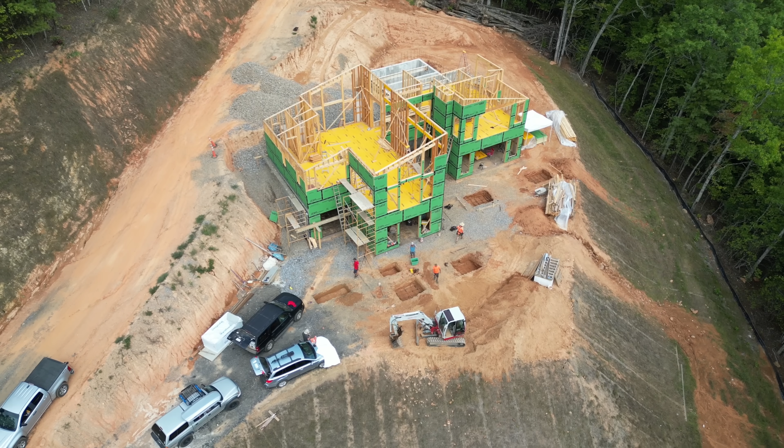Eric and the guys have completed the steel work down in the base of the footing, and it's really large and strong looking. I'm very happy about that.

The next part I'm going to do is build a square plywood box that will be the form for the part of the column that actually sits on the footing. It's all going to get poured together at one time, so it has to be suspended above the footing with some stakes and braces, and it also has to be precisely located.

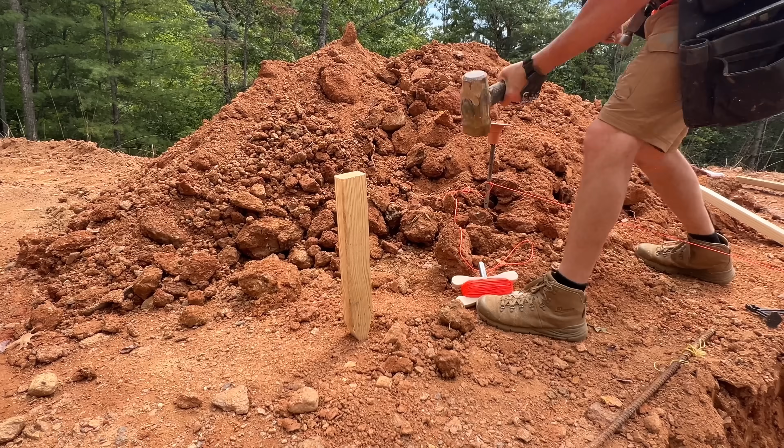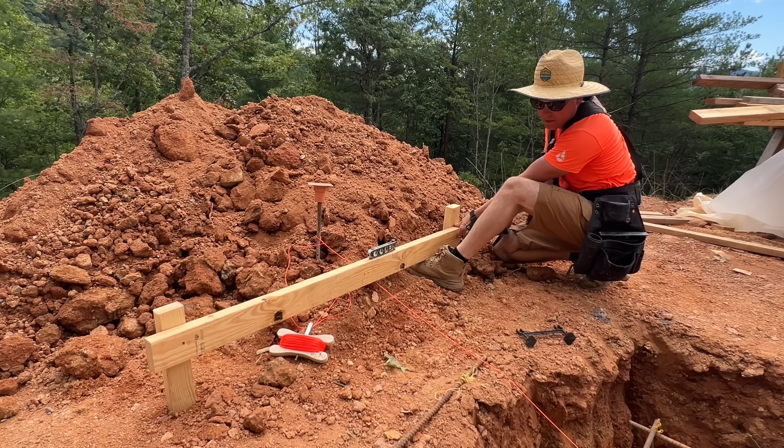Since I'm getting to a part of this job that needs to be more precise, I'm going to build some batter boards so I can move my string back and forth instead of having it just attached to a metal peg on each end, because there's no way to make fine adjustments when a string is just hooked to a metal peg. I need something where I can move it over an eighth, or move it back and forth. All right, that's not terribly bad.

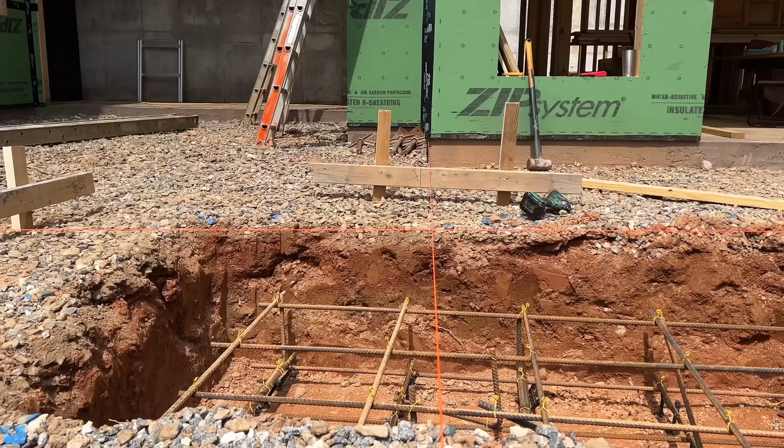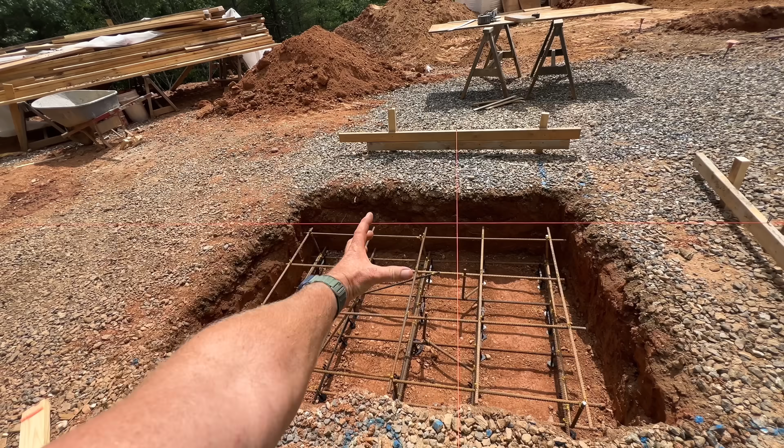Jamie and Jono have these string lines pulled accurately across the top of our batter boards here, or so they say. Now we can place some framing that's going to go across the footing that will be the outside edge of our formwork for our pier that's going to come up through our slab. So that's the next step.

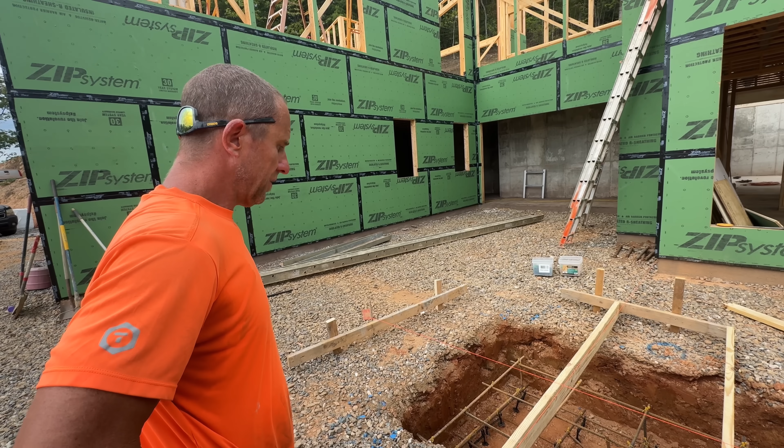We're ready for our forms on this footing and that footing, and that was a lot of work. My back is killing me. Yeah, that was a lot of work. I was thinking, oh, we got a big trackhoe, dig some holes, no problem. No.

And it looks like Jamie's got all of these footings now drawn into the SketchUp plan, the master plan of this house. What can you tell me about these? Well, I can tell you these things look huge because they are, but I'm also really trying to visualize what's going to happen where the post framing sits on top of the pier.

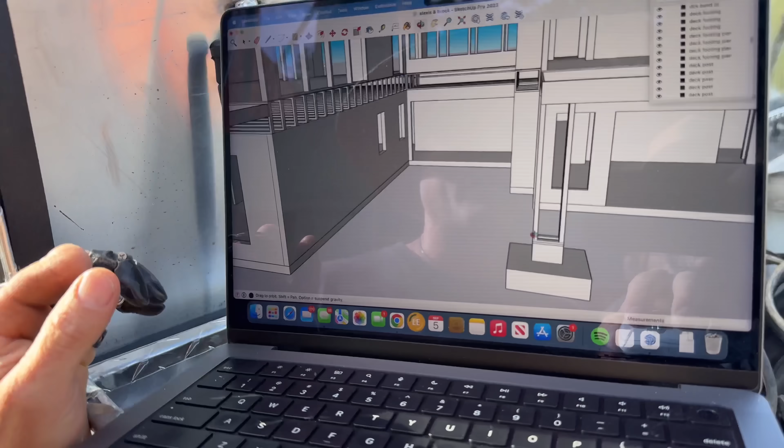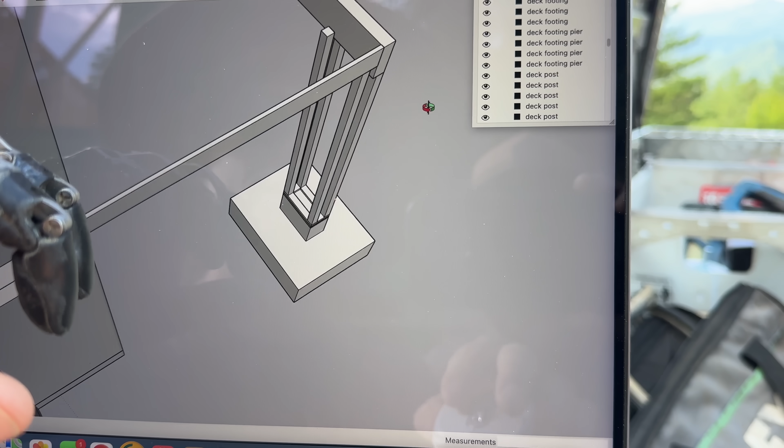So that pier that we're building the form for is right here, and then we have wood framing above that going up to the bottom of the deck. Now this intersection right here, I don't love right now. We have a giant laminated treated beam, and then we have standard 2x10 joists butting into that. And you can see I have my posts just ending out here in the middle of nowhere. I don't know how we're going to do this yet because I don't love this.

I'll get it in the screen here someday. This right now is not looking good to me, and we need to figure out a way to flash it all. That's really what it comes down to for me. I'm thinking ahead about the flashing and the finished surfaces on these columns and the decking all meeting there, and how to make it waterproof so water never goes into the column to rot it out.

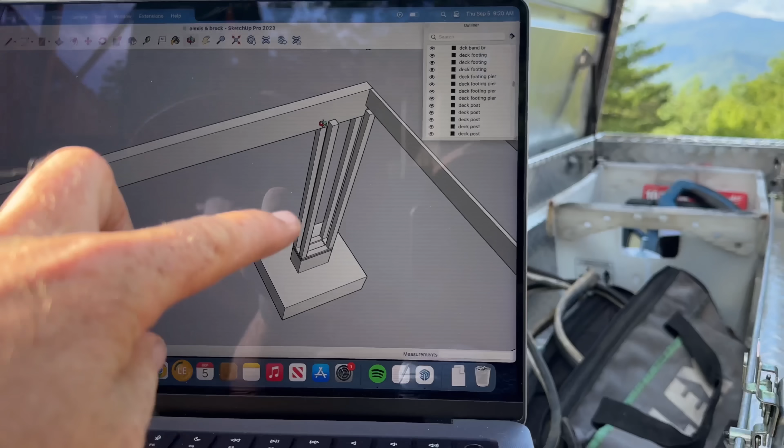Yeah, and I do want to mention that the way he's got it drawn here, there will be sheathing and siding, so it'll be like a closed-in column. It'll look like a little miniature skyscraper. That's what we're building, skyscrapers right now. It is, these little mini ones. That's a good way to put it.

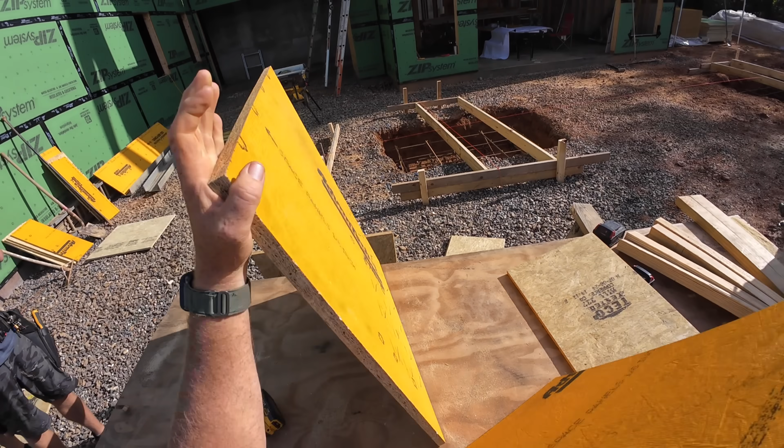The guys have got a lot of these pieces cut now, so I'm going to start assembling. We're going to put the coated side in because I think the concrete is less likely to stick to that than to this side, not sure really. And we're just going to use a finish nailer to tack everything, and then we'll come back and add some screws or something. So here we go.

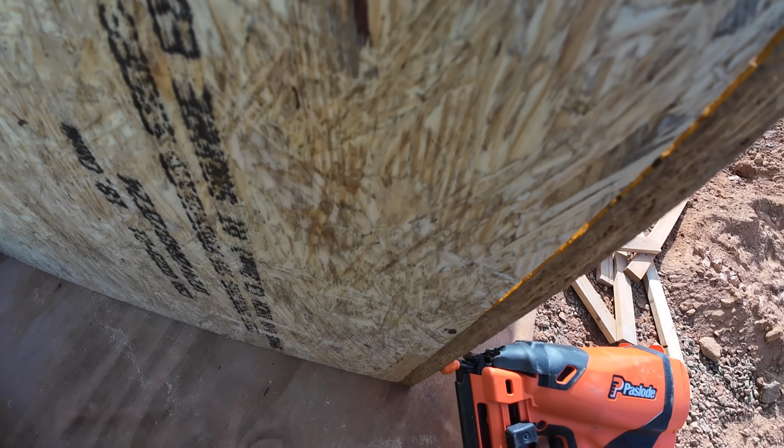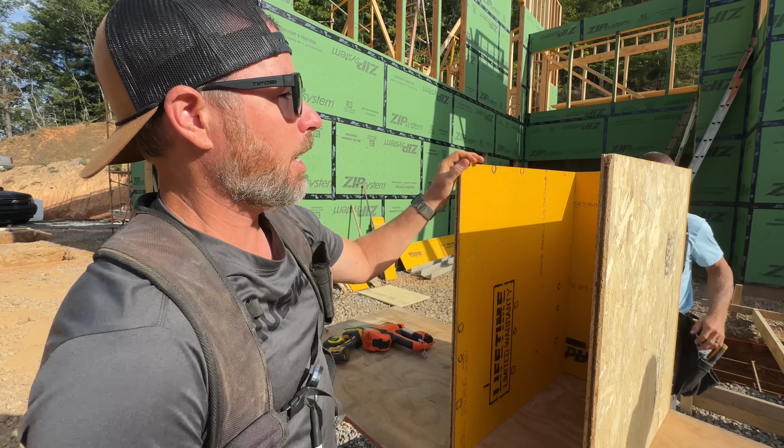Now I'm going to show you guys how to disassemble one of these, because these were supposed to lap on the outside edges of the end, and I didn't check that first. It's no big deal, yep, that's how you disassemble one. Let's start over. John, you got pliers right there.

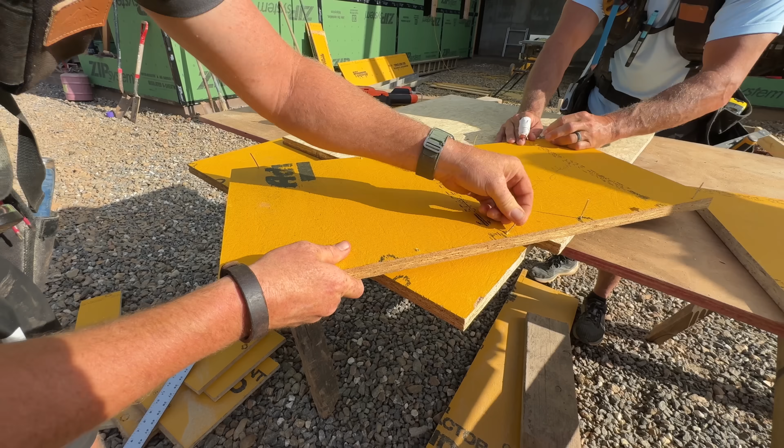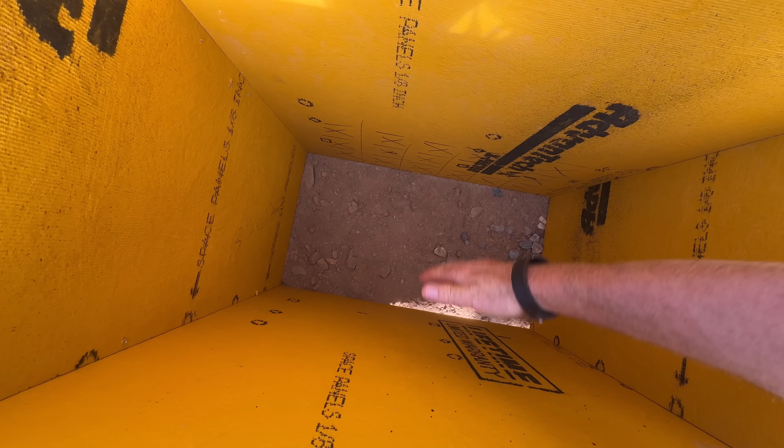Jamie said I just built a subwoofer box, but yeah, you're actually right. Listen to this. Based on the frequencies I'm hearing right now, I think we may have just found like a golden ratio here of subwoofer. Let's see what kind of tones we're getting here.

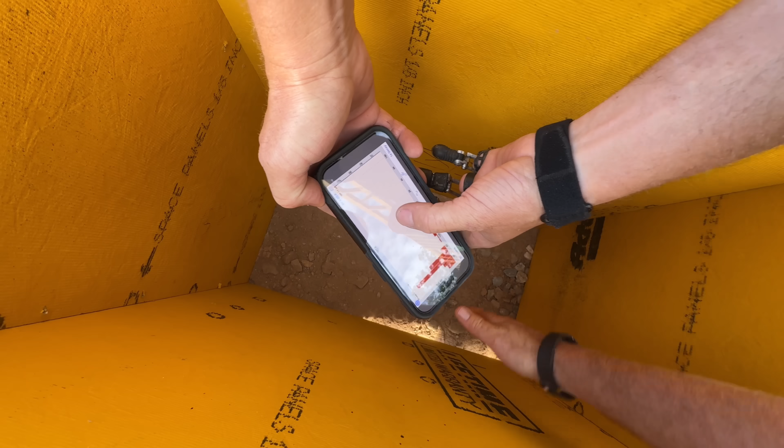Oh dude, that thing is hammering hard at 40 hertz. 40 hertz, is that good? Yeah, that's like the low end of a kick drum, like on a drum kit. Yeah, that's the bit you feel. Oh, like in your chest. Yeah.

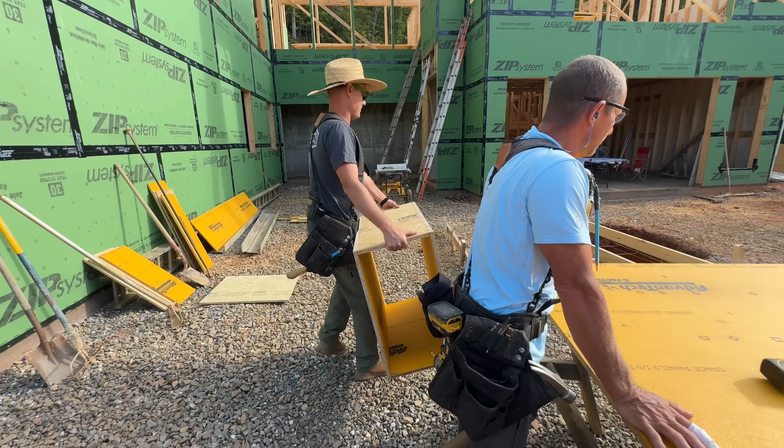We've got marks here where the outside surface goes, and if we bump this over, it should be squared up and everything, because the way we installed these, they're square to the house, right? It should be.

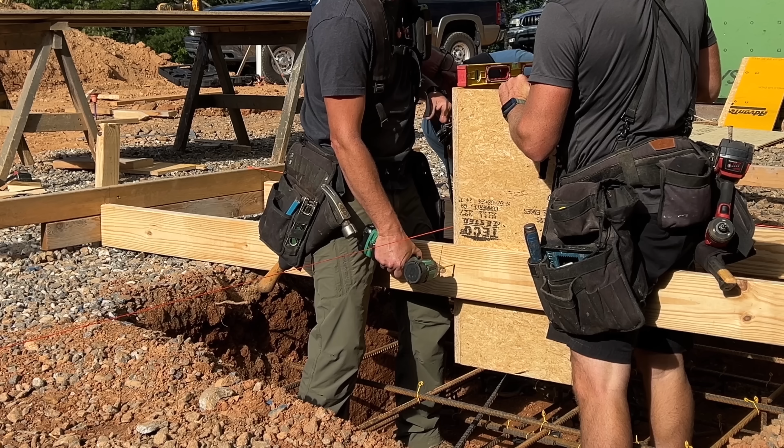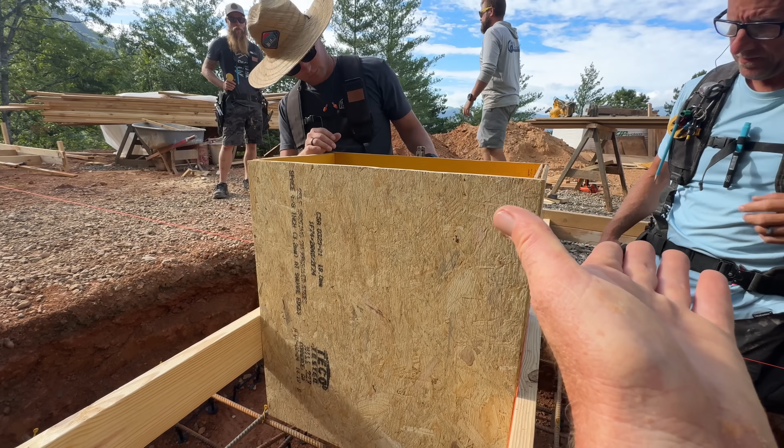Okay, I'm good there. Now we need to lift it up off of the steel down here. We've got this first box suspended at the right height so the footing will be flush with the bottom. Then we're gonna set up a laser and cut all these the same height at the top, I think is the plan. We might also add a brace, because right now it's a little to the side. We could probably cut one in between that batter board.

That's the slab height, so we're gonna come up a foot from that. I was thinking we could pour this without a pump for the concrete. Yeah, but dude, there's no way a concrete truck is gonna get around that to get here. Probably not. It's probably a full yard of concrete in each one, at least, maybe more.

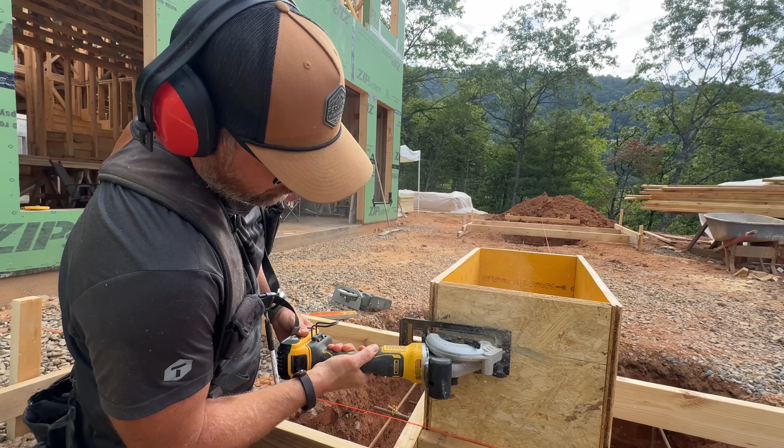There we go, the top is cut off at the right height. Maybe you could tell everybody why we decided to mark it and cut it off in place instead of just putting it at the right height to start with?

Yeah, that's actually a good question. The reason is it's really difficult to get it oriented in three different axes all at once. It's near impossible, you'd have to just fidget. So we broke it down now into orienting it level, and then after that, a second step, getting the height correct. It's a lot easier and we can get it more accurate on the first shot. I think it's less stressful too. I think it's a good way to go.

Yep, axis is the word? Yeah, it's what they used to cut down trees a long time ago. Maybe it's axes, I don't know. Axes, dude, that's possessive. Don't matter. I don't know.

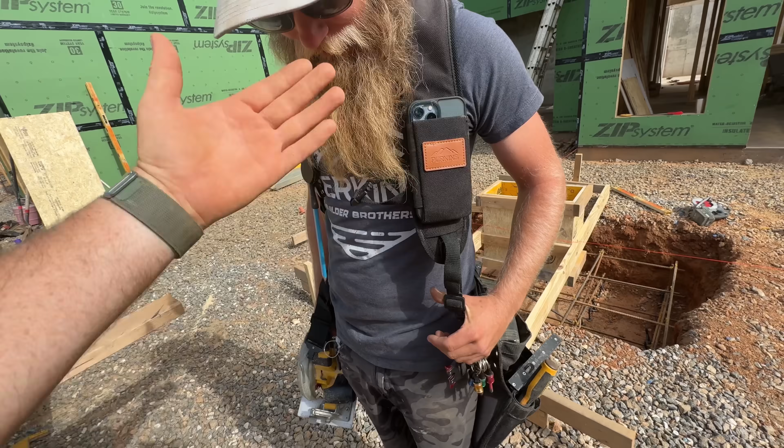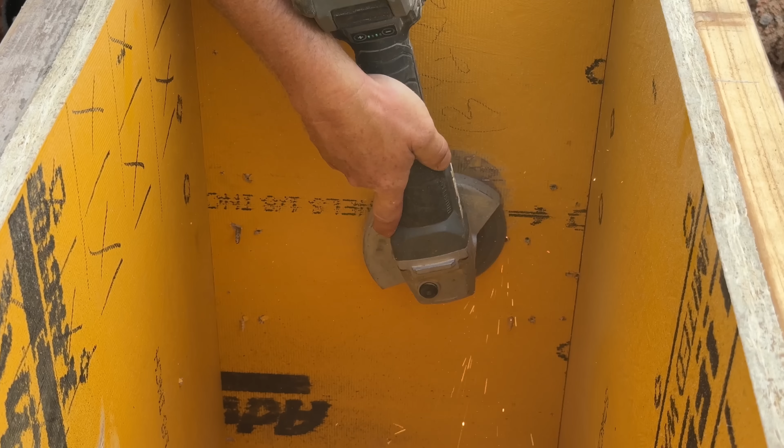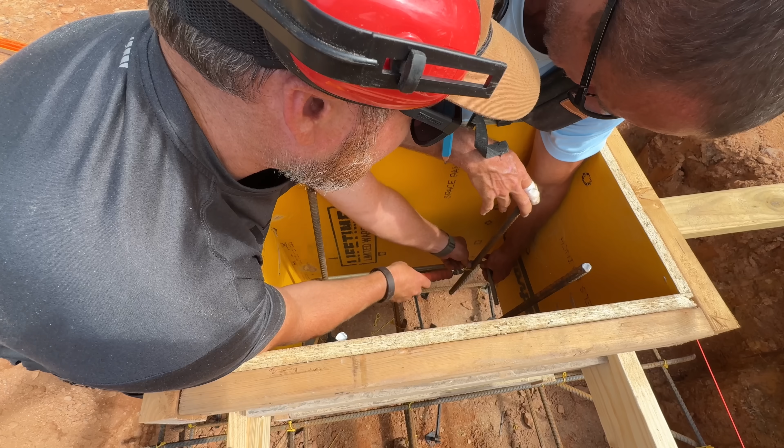Sorry. Well, if you thought we were done with these, you're wrong. Unfortunately for us, we've got to add steel now that goes down our columns and ties out into the mesh of steel below. I think we'll do 4 or maybe even 6 of those per, Ray. Start with 4 and then let's look at it. It's turning into like building these walls with all those forms, man. Jason and I are basically having to make this work with tying the steel inside these things, so that's what's going on here.

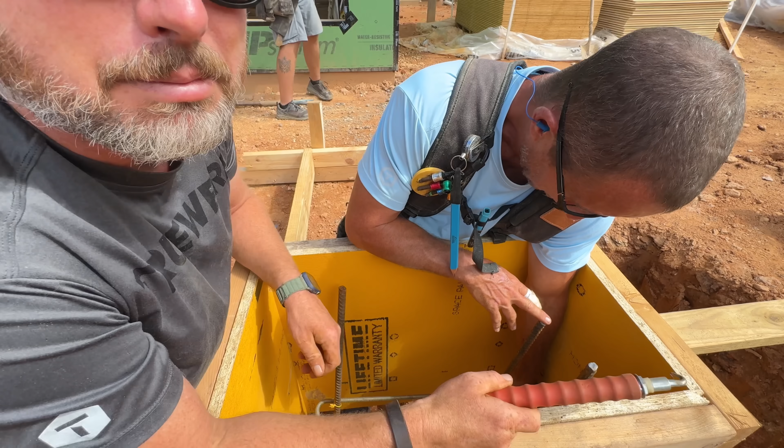And I didn't want to say anything, but dude, you smell really good. Oh, really? Yeah, I don't know what you're wearing, but it's driving me crazy. Man, hey, could be worse I guess. I've never had that happen at work. Come on, I'm flustered now. Give me the other half of that.

These guys are jumping over here to start putting up these batter boards, these horizontal pieces. They did something smart, which was to mark all the stakes with the elevation of the slab, so maybe we can skip a step over there. We just didn't have the laser yesterday. Well, we learned how stupid it is to have all of our boards at a different elevation and slanted, but like you said, we just didn't have the tools to do it right the other day, so we did it.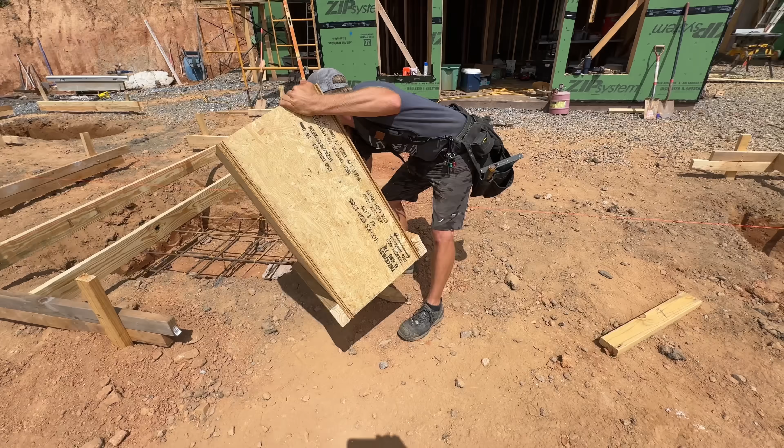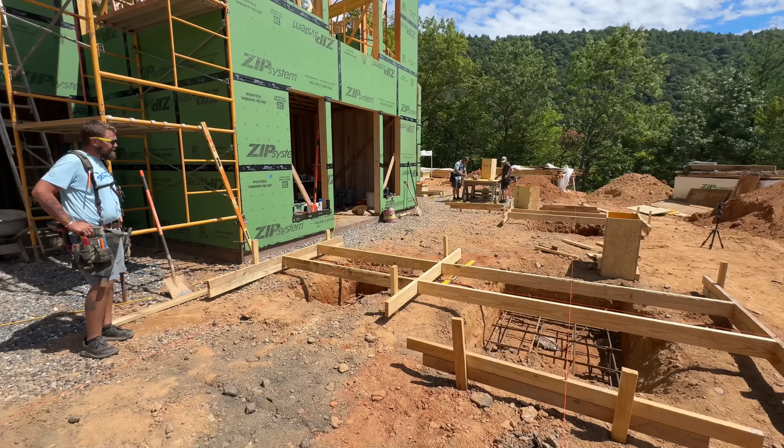Jono and I were able to get a labyrinth of supports for our forms put in pretty quickly over here, because we've just done it a few times so all the numbers are just memorized. Now we're ready to start setting these forms in, and I gotta redig a little bit of this one. Evidently I went that way with the footing, I should have gone that way, so we gotta dig back to right there. We gotta move all these cars, we gotta drive the machine back down the hill.

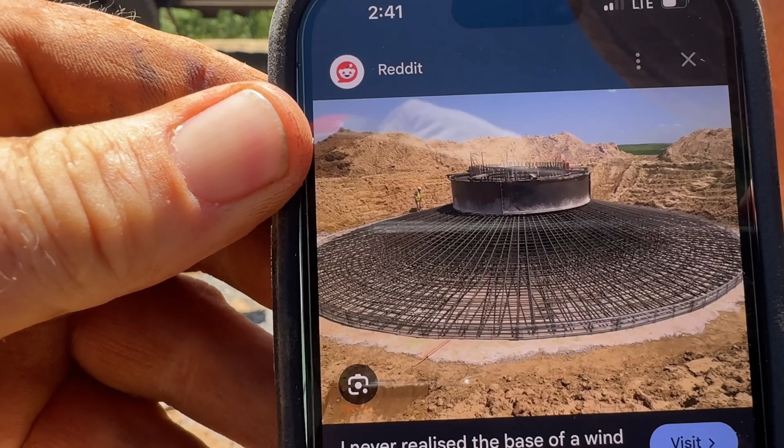We got our footing elongated, our steel fixed up to run all the way to the end, and now Jamie's showing me pictures of windmill foundations. Windmills that make electric energy from the wind. These foundations seem kind of big and crazy to us, but this ain't nothing compared to like a real pier foundation. Look at that guy, he's like, what am I doing here, where's my help? Dude, there is so much steel and concrete in those, I can't even believe it, I can't get over it.

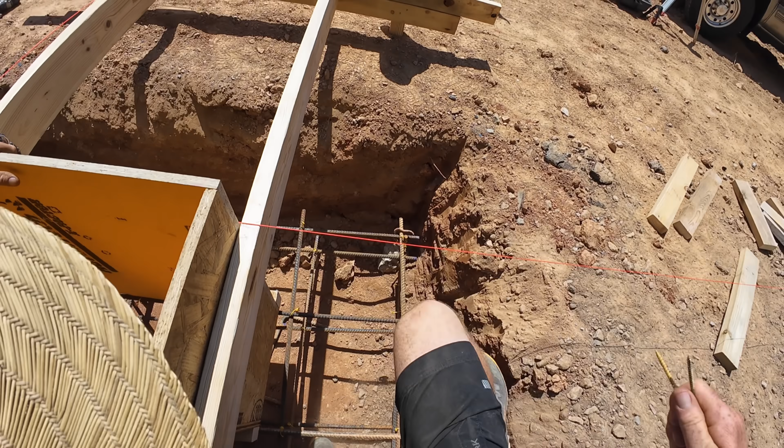Okay, you lift it up to where you think it's the right height at the bottom. That's pretty good, pretty good. I can't see the line, but you're on it.

Okay, now we got a level. All right, you tell me up or down. Whoa, you're going too much, down a little. It's terrible jumping down in here. Yeah, it's very hard. I can't see your line, so just hold it level. Okay, yeah, you're on it.

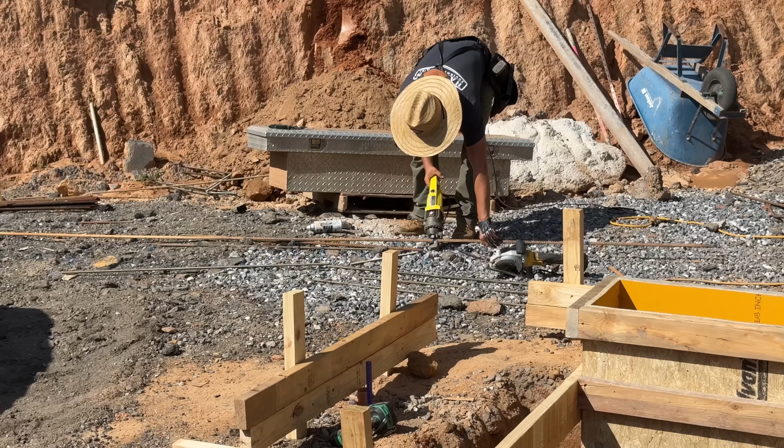I gotta ask you, why are you using this all-thread rod for the hoops instead of rebar? All right, I'll tell you why. Usually they spec 3/8 rebar for this type of little hoop thing. I don't have any. We have 5/8, I could do that. We've used half inch in the past, but we're all out of that. This 3/8 is galvanized. And I don't even think these hoops are required or anything. But we don't need this for something else, is what I'm asking. Oh, okay, sorry, I didn't read the question right.

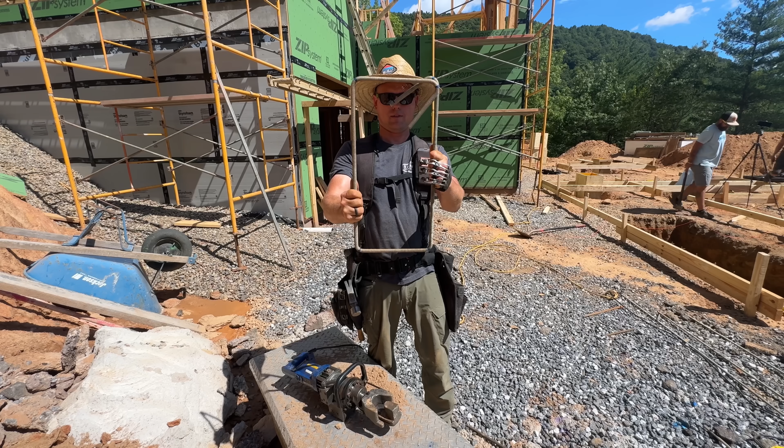We don't. You know, there was a time when I told Brock I need some all-thread rod, and he brought this here, but it wasn't the right size. I'm just checking that we're not messing something else up. No, trust me, it's all up here. Okay, it's all there, perfect. That's your best one, I'm pretty proud of that one. I'd be happy if they all came out like this. I'm gonna cut off these last couple, tie a little more rebar. These things about got the best of us today. Yep.

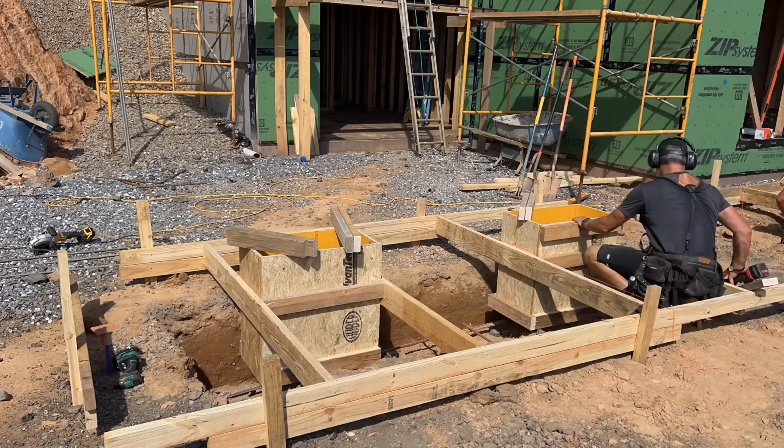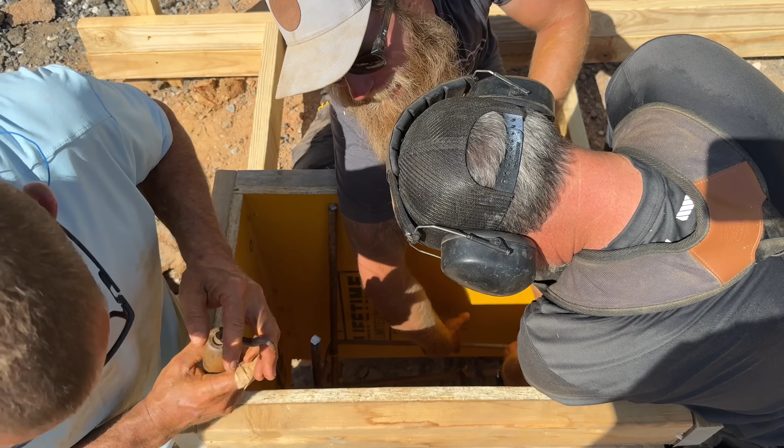Jamie, you want to put your hands in here? Feels like we're bobbing for twist ties in here. Dude, I gotta tie that one off. I'm afraid to go down there again. Ray's going snorkeling down here in the bottom of the footing, trying to get tied in somewhere down there. You get it? Yeah, I got it. All right, good job, buddy. Don't stand up too quick. I know, no, do stand up too quick. It's awesome. Done.

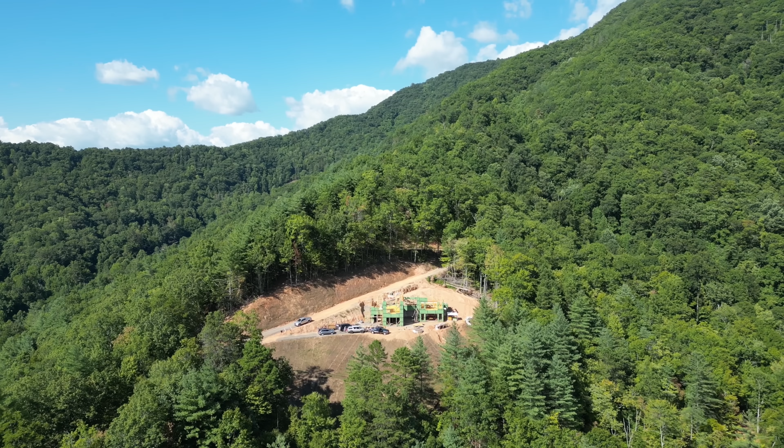Back at the job this morning, and we're awaiting the concrete arrival to pour concrete in all these footings and piers we've been working on the last couple days. Jamie's figured some concrete in cubic feet, and he said he's going to do it in cubic inches, but I'm not going to let him. Don't worry, I'm going to get... So yeah, we're going to double check things and wait on this truck. We're going to figure these in cubic millimeters now.

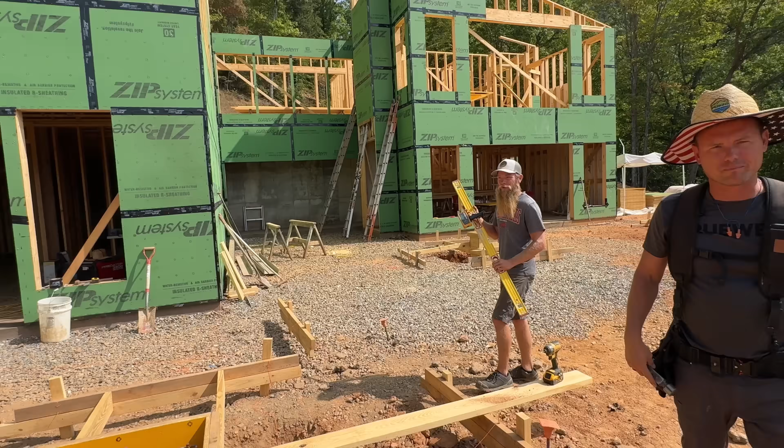Ray said he went to another sheep show, but it wasn't as good as the local one. But I did see a comedian hypnotist. How was that? That was interesting. It was really interesting. I didn't believe in it, but now I do. Huh, interesting. All right, let's see what the comments are about that.

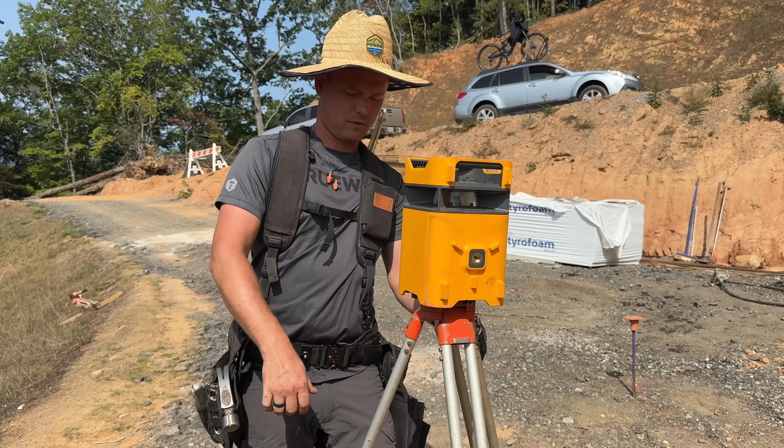Did you lose our Geomax? I think you have it. I can't find it. I must have it. I hope you do.

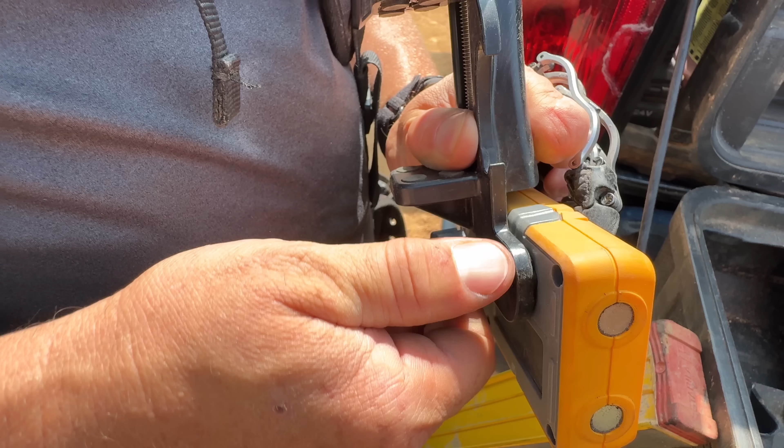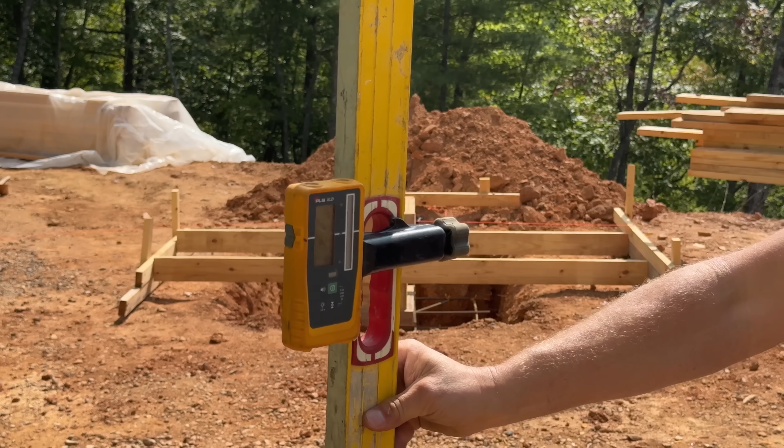We've got our laser level set up now, and we're just checking that the top of all these forms are the same, or roughly the same, within about a half inch is fine, since we're custom cutting all of the posts to go on them. But if we wait until the concrete's poured and then figure out these are like 6 inches different from one another because of some stupid mistake, that's bad timing to find out.

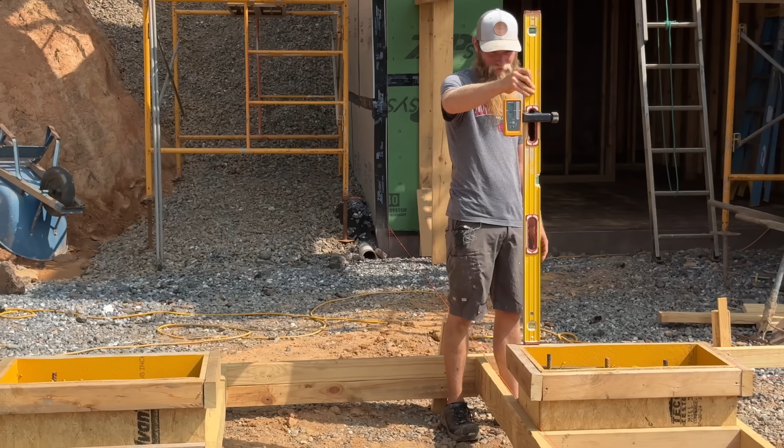How are we looking? Within an eighth, which I think is perfectly acceptable here.

You remember that time we did the whole foundation with the laser out of level and didn't know it till later? That's a good trick, right, just kind of skewed it a little bit. There's a reason we're double checking, stuff has happened. Well, these are pretty far apart. You said, what if one is just randomly 6 inches taller? That's possible because they're not close enough to each other to tell if they were a little bit different, just looking at them. You could lay down and look.

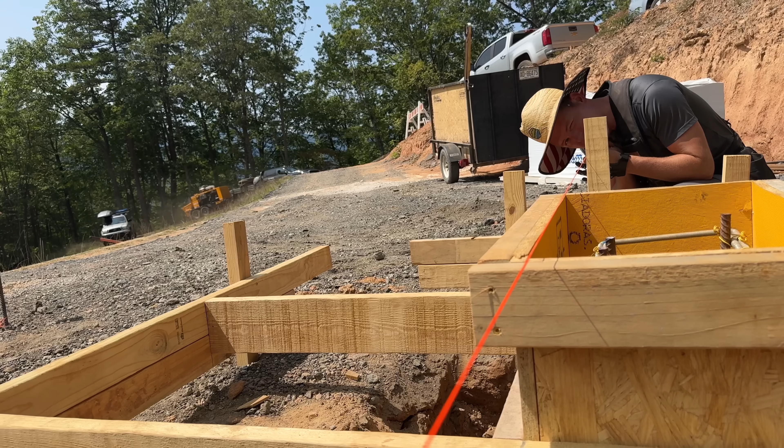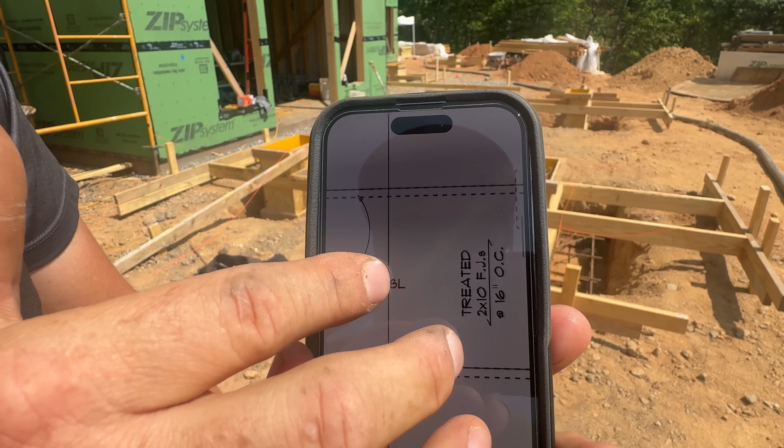We're moments away from getting concrete here, but we're looking at the deck framing that's going to sit on these piers, and some of it is crazy here folks. It switches from these treated PSLs right there to 2x10s for the band over right here, then back to PSL, which is a different height, back to another PSL, then back to 2x10s, but that's the same span that had the PSL. The problem is the PSLs are deeper, so the top of our posts will essentially have to have two different heights so that the top of the deck is flat. It's gonna look silly if it's a different height band at every post.

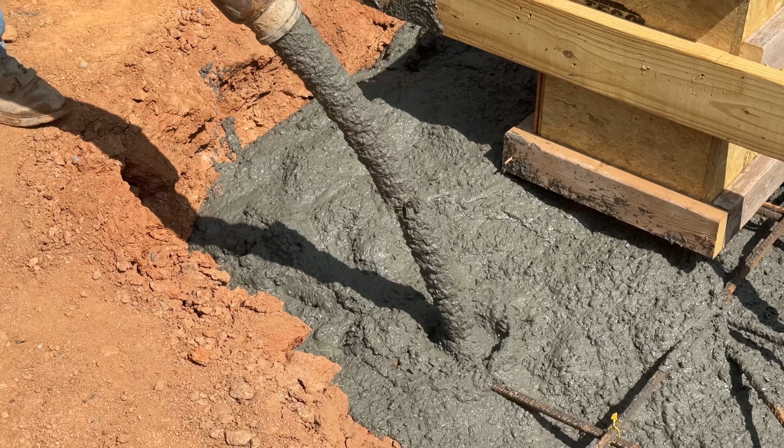Got the concrete going in nice and stiff for this bottom layer so that in a minute we can come back and pour these columns. They won't just push it out the bottom.

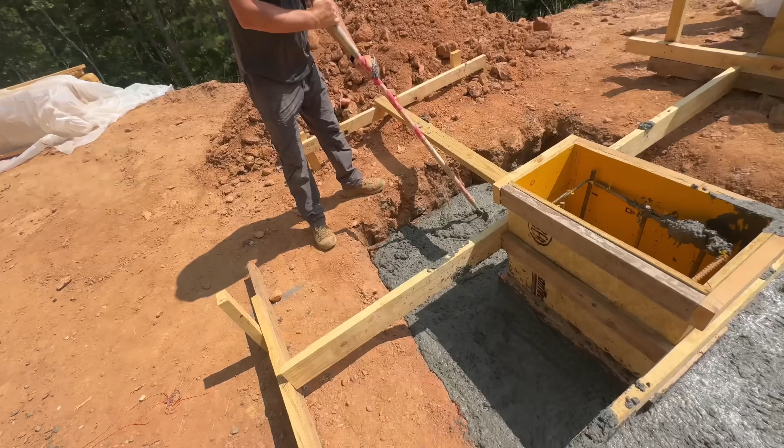It really doesn't matter how smooth this is like you're doing there, I appreciate that, because we don't have to lay any block on it. It goes up here. I know it's tempting to... I know you.

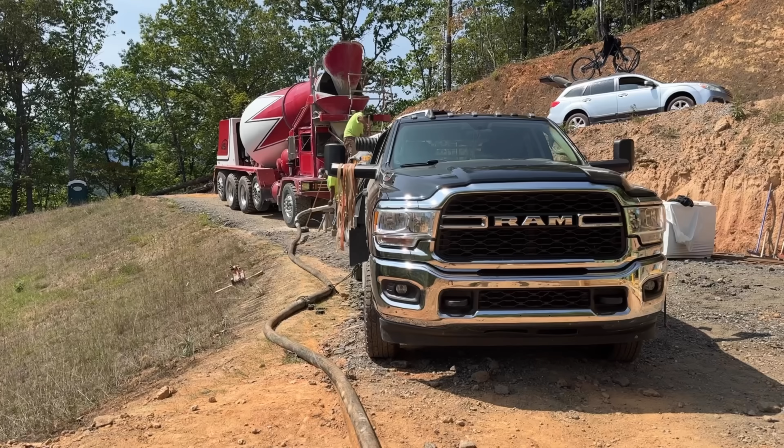This is 12 yards of concrete, which is as much as some of the houses we've done for the whole footings for the entire house. Just on this half of the porch piers, there's like this many more around the side and in the front once we get that backfilled up there.

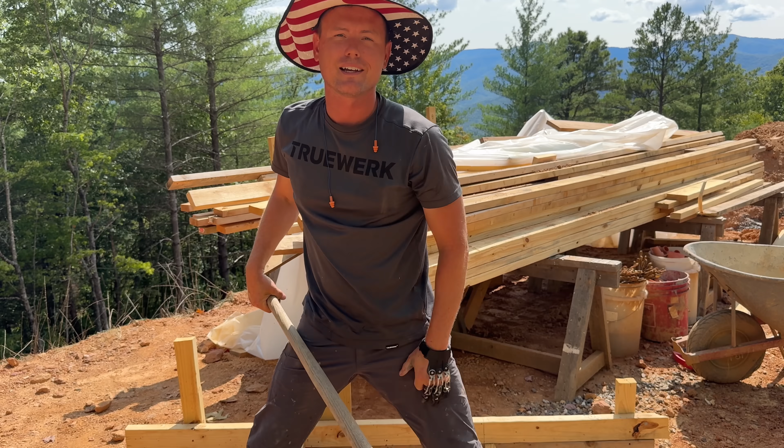Now it's time to start back at the beginning and fill up the little column that's inside the form. And we need anchor bolts. I did remember to buy them. You robbing Peter to pay Paul here or what? Yeah, it's a little bit of circular thinking. You put it in the top, it goes out the bottom, you get it again.

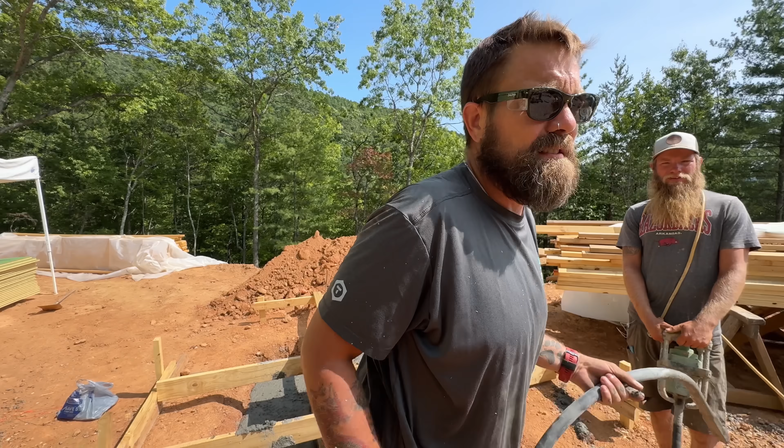7 more to go. So the one thing that does matter here is that we end up flush with that, that's our height we're going for. So I'm gonna slick this off, get ready for some anchor bolts. This doesn't have to be really finished nice, it's gonna get completely covered and enclosed by a wall or a column.

Let's see if these anchor bolts will stand up here. Oh yeah. So we're just doing 4 of these anchor bolts. We'll basically rip a piece of 2x8 and make it like the full square of the size of the column. Normally you'd use brackets here, but since we're gonna have sheathing, we can nail that sheathing to this plate, which will tie the vertical part of the column to the plate, just like a bracket. And these brackets are stupid expensive too.

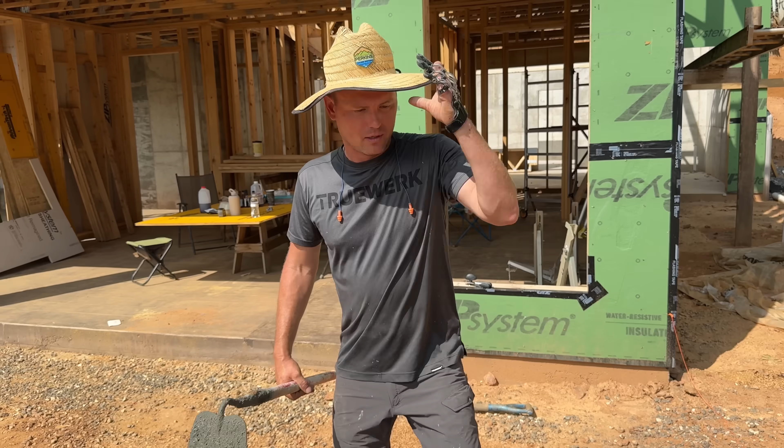Don't you think we should spread these bolts a little bit closer? Well, if we put a post there, I guess that's good, and then that's good, that's perfect where it is. Sometimes I just gotta let Jamie figure it out on his own because he won't believe me.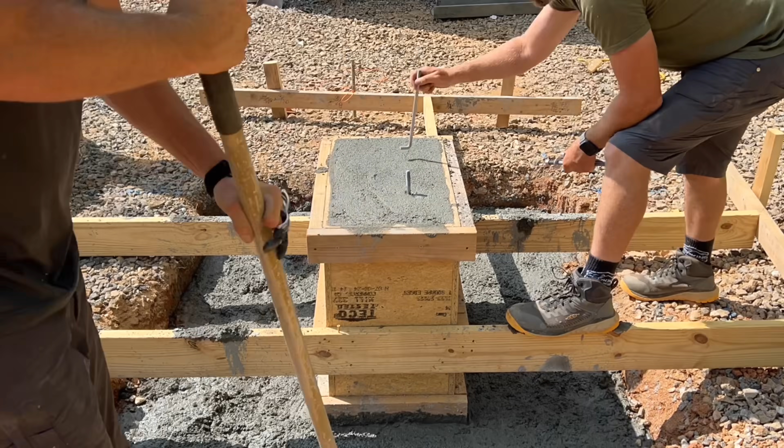That is a wrap on our concrete pour here. It went really well, I'm really happy with these columns. They're gonna be strong. So tomorrow we'll be able to tear this stuff off and start building a deck. Decks, multiple.

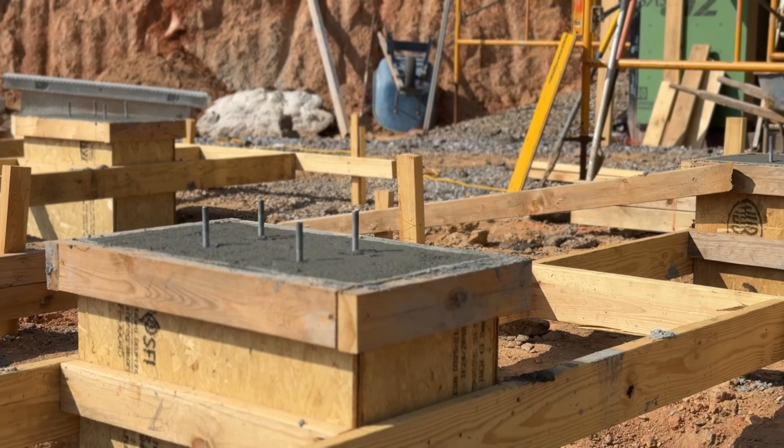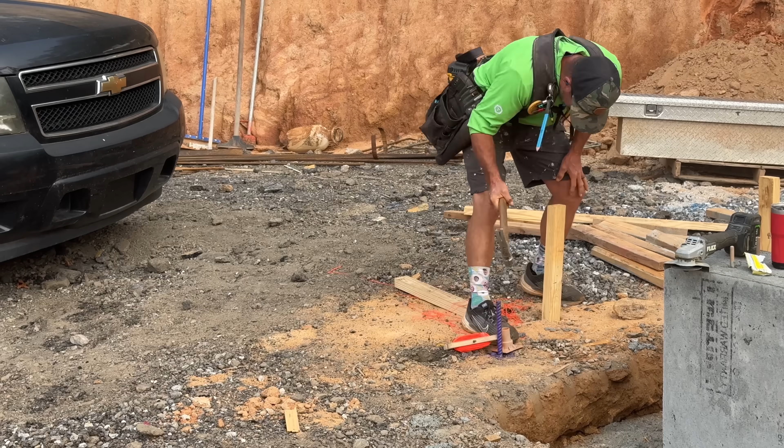Dude, this thing is warm, it's like, look, it's steaming. We are back at it this morning getting these forms pulled off, and it looks like these are going to turn out nice. They've got an Advantech texture to them, and even though we didn't use form release, they're coming off nice and easy, and it even left some of the printing from the Advantech on our columns, which doesn't matter, they're going to get covered.

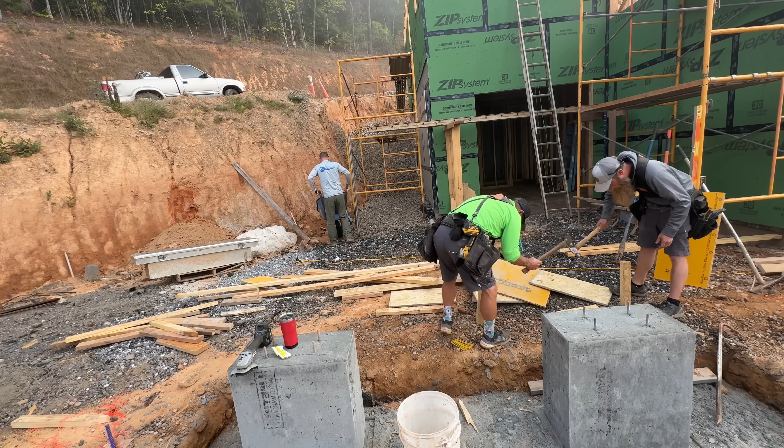Those are pretty sweet columns, man. I'm a little jealous I don't have columns like that.

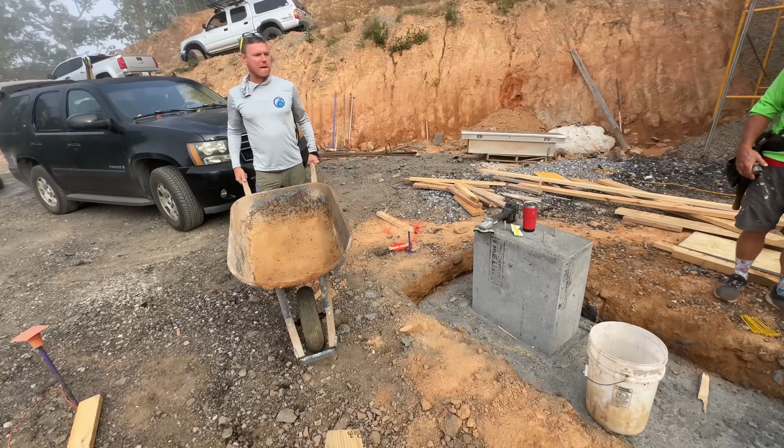Let's save all these stakes for the whole front, we got to do a similar thing around the front, so we'll put them in the wheelbarrow. We're having Jeremy walk down here with the machine so we can backfill these footings before we start setting up ladders and stuff around them, which is going to make it a lot easier.

Hopefully Jamie knows he's got a trailer attached this time. Yeah, I think he sees it.

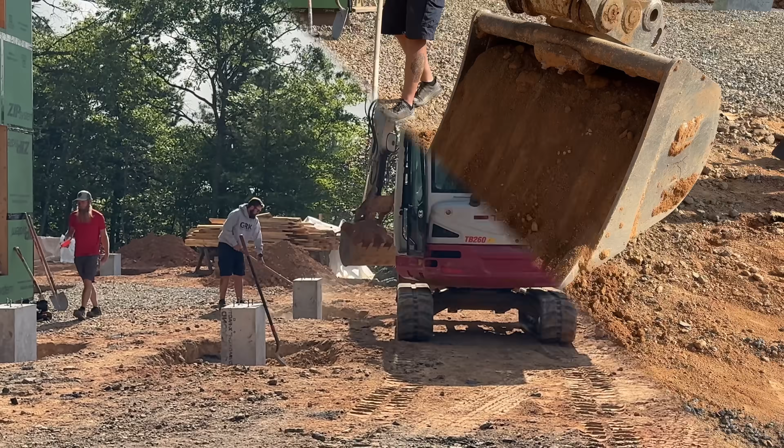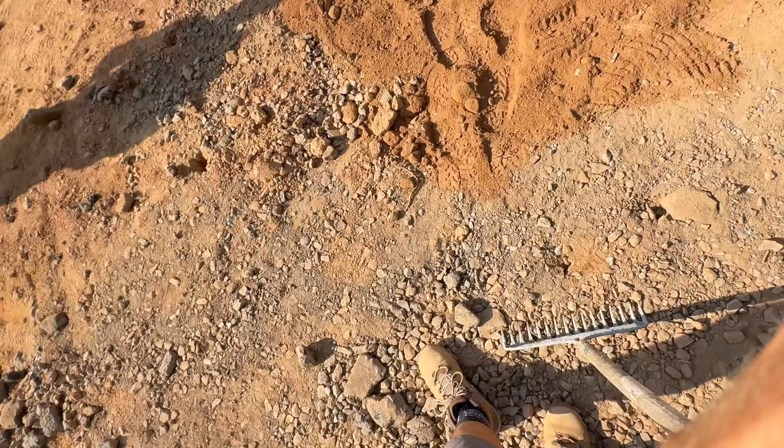We ordered one of the new Milwaukee cordless rammers to compact soil, but I don't have it yet. So literally today we're gonna do the old school foot rammer, walking it in. Pretty soft. Pretty unfortunate. It is, that's really sad. Yeah, I ordered it yesterday.

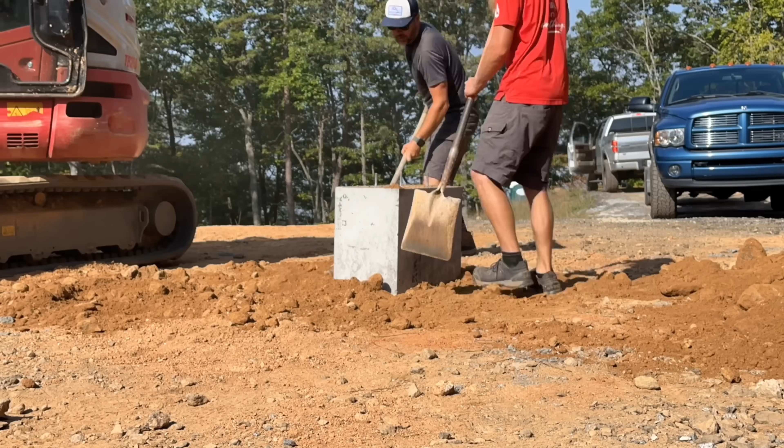We're just trying to fill these holes up flat with the existing grade, and he's filling them a little too high. You got Dr. Phil up here in the machine. All right, cut, you know?

Every time Jamie asks me to video him, I'm like, in my head, I'm like, what's he gonna say?